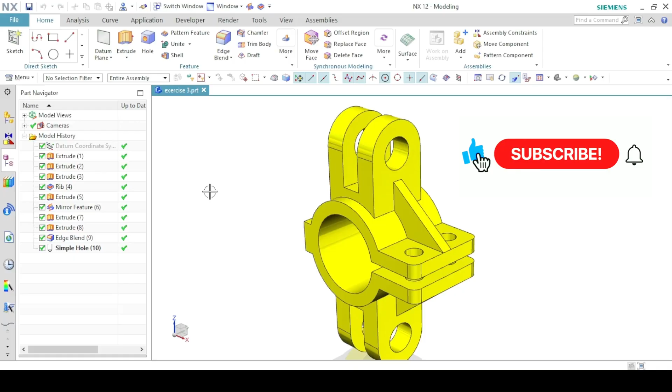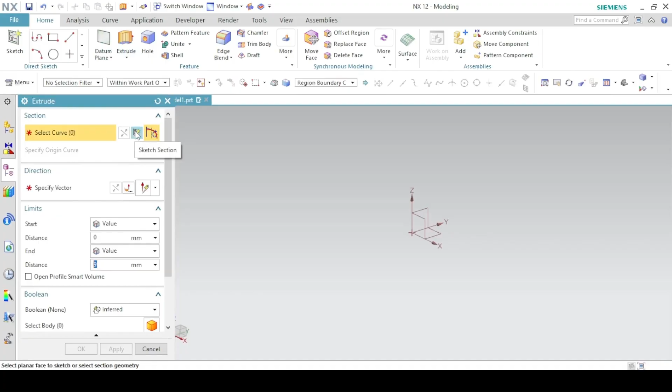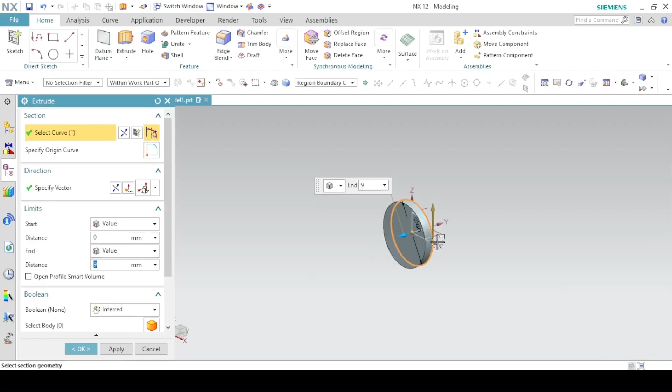You sketch it on the front plane here, which is the XZ plane. Okay. So a circle of diameter 60. Finish. Then we extrude by 50 millimeters. Since you want to make it symmetric, on the start value, we use a symmetric value. And it's 50, so we use 25 so that we have 25 coming forward and 25 going backwards. So when you combine the two, we have 50 millimeters in total. So apply.

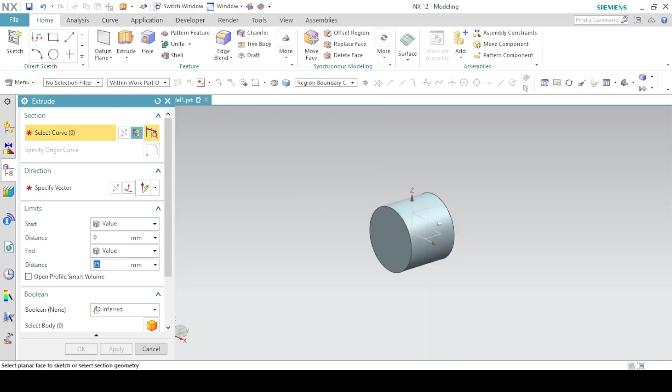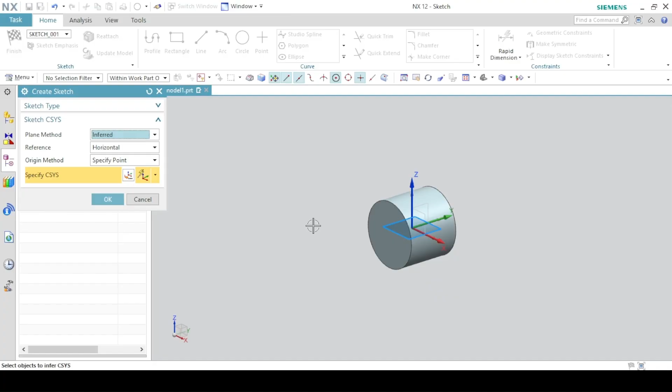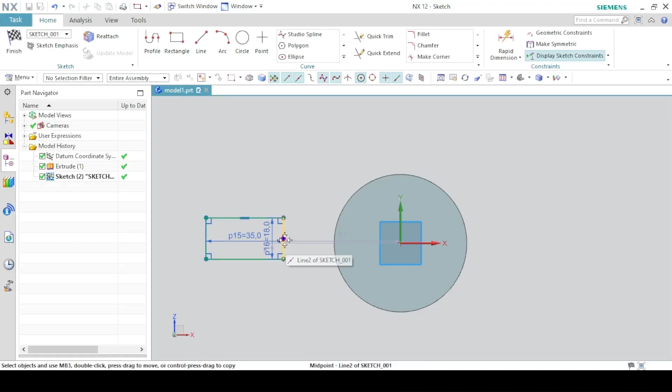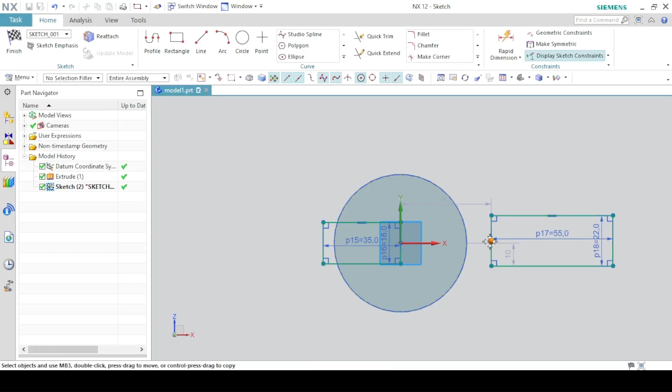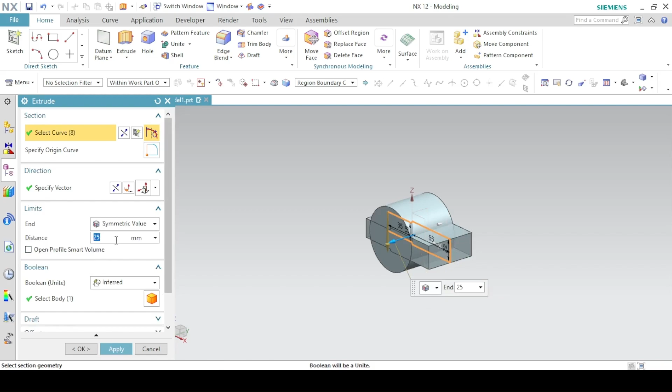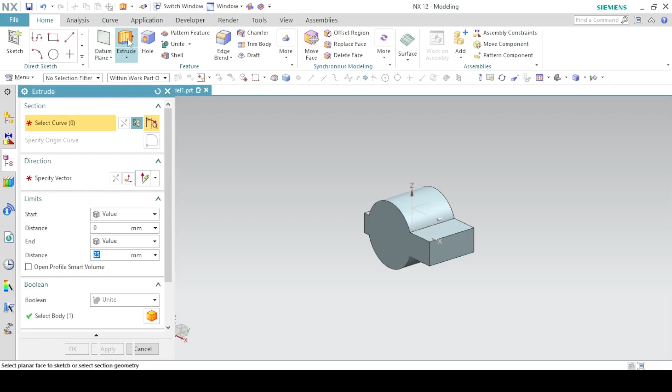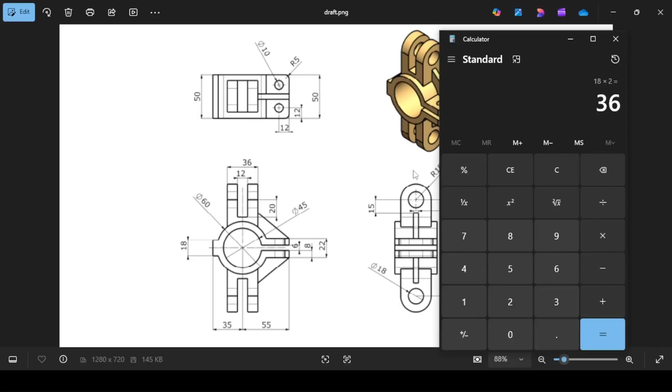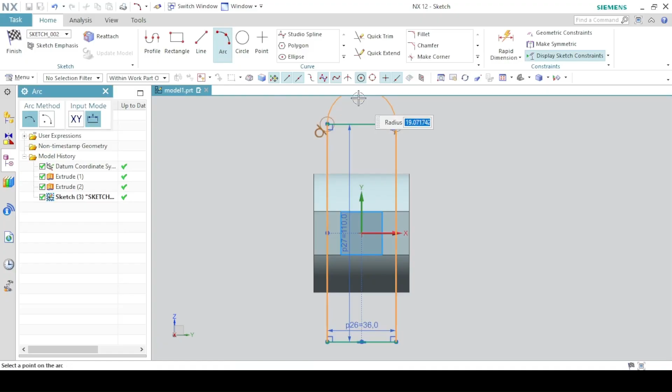Next, to create this slot here, we are going to create them as one block from the top to the bottom here. So again, extrude, sketch section, and this time on this side view, which is the YZ plane. First, we have a rectangle, and the height of the rectangle should be 110, and the length should be the diameter here. So since the radius is 18, the diameter is 18 times 2, 36. So 36 by 110. We use the center rectangle, 36 width and 110 height. Click. And then we draw arcs on these ends to be tangent. And we trim these unwanted edges.

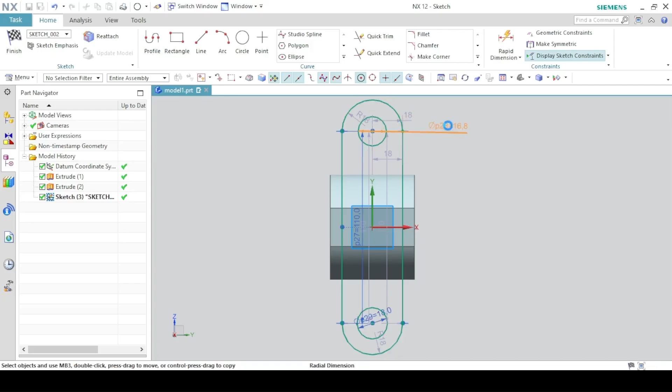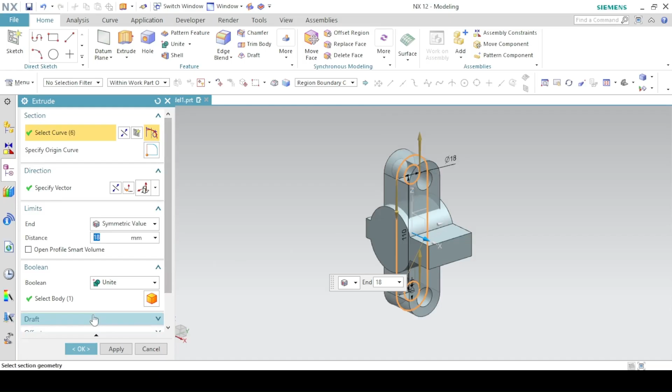Then we add two circles of diameter 18, and their center should be here. So this diameter, change it to 18. Finish. Again, we make it symmetric, so symmetric value, and the width is 36. And since you are using a symmetric value, you have 18, so that's 18 on one side, 18 on the other side, combined will be 36. Set the boolean to unite. Okay.

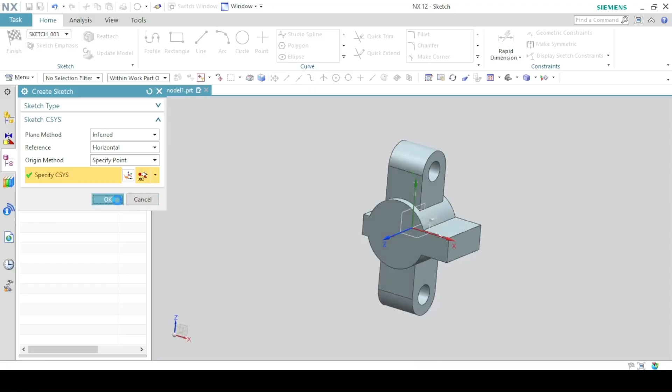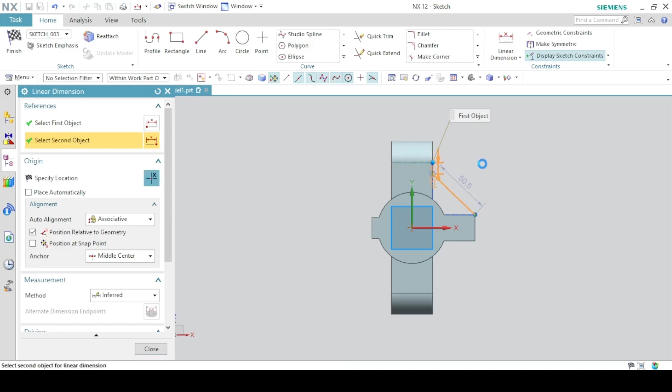Then we can have the rib here. So it locates the rib feature, sketch section, and we sketch the rib on the front plane, which is this XZ plane. The rib starts somewhere here to this point here. On this dimension, the distance from the center here to the rib start is 15. And the center will be here, so the distance from this point to this point, 15. Finish. And the rib should have a thickness of 6 millimeters. Okay.

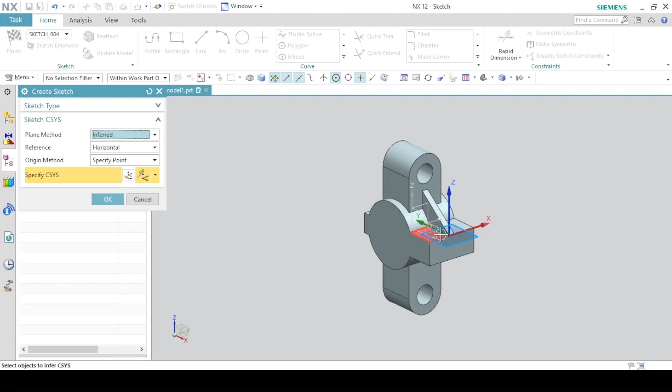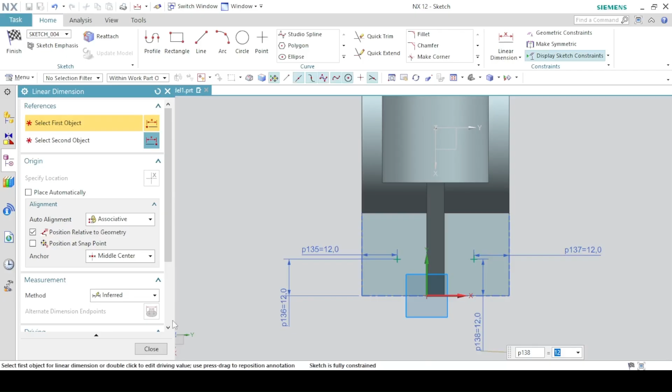Next, we are going to make some cuts. So first, we cut out this hole, and the hole should have a diameter of 10 and 12 from the edges. So with the hole feature, come to sketch section. We are sketching on this face here. Okay. The first point should be here. Second point should be here. And the distance from the edges, 12. Okay. Finish. The diameter should be 10, through body, and okay.

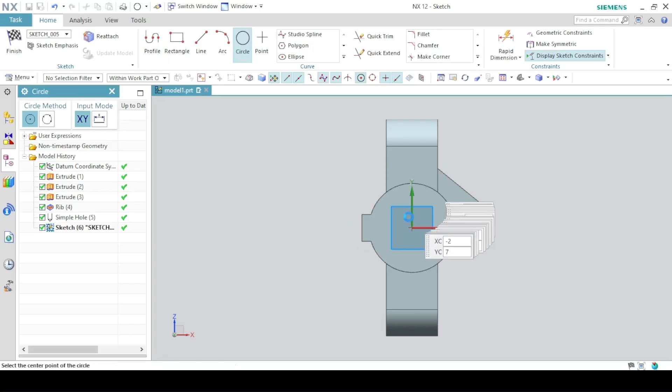Then we make a circular cut here. So we cut a circle of diameter 45. We extrude and sketch section on this face here. Circle of diameter 45. Finish. Reverse the direction, and then we are cutting until next. Set the boolean to subtract. Apply. Again, you're going to cut this face here. Okay.

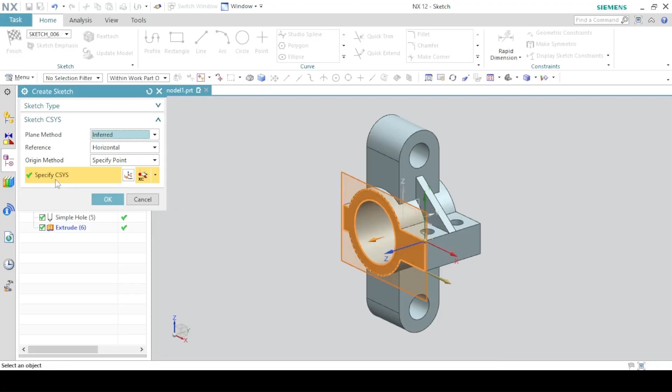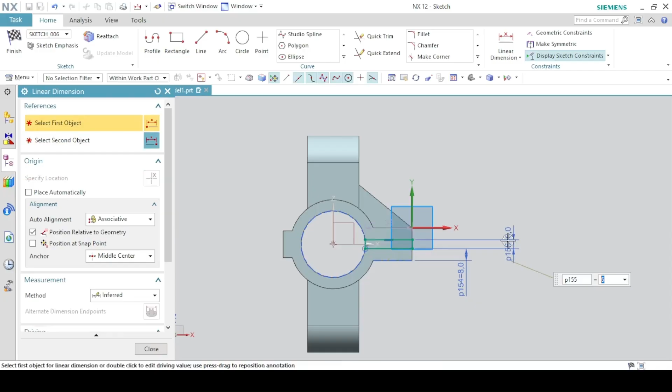Then we cut a rectangle starting from this. Okay, we use the by 2 points method to this face here. Now let's dimension. So the distance from this edge to the start of the rectangle is 8, and the rectangle has a height of 6 actually. So from this line to this line is 8, and the total height here is 6. Okay, so finish and reverse the direction of cut. Set it to until next. Subtract. Okay.

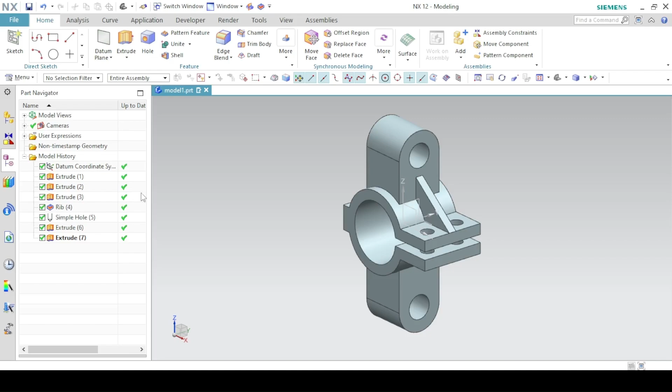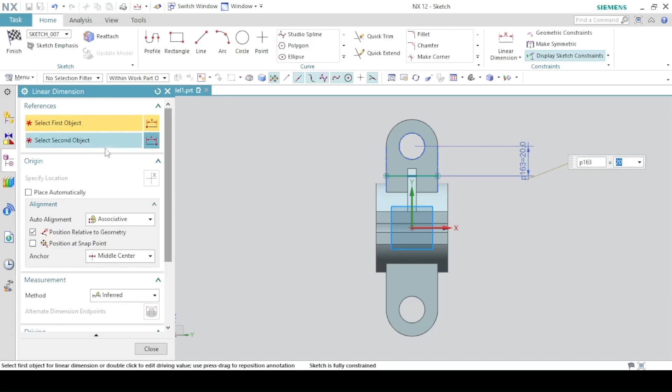Next, you are going to make this cut here also. So extrude, sketch section, and this time on the side view. So you're going to draw this shape inside and then extrude. So we cut a line. And then the distance from the line to the center here is 20. And then instead of drawing this profile, we just have to project the curve. So let's project curve. Click on this arc, this line and this line. Okay. And then we use a quick trim to trim this. We don't need it, so this is just what we have.

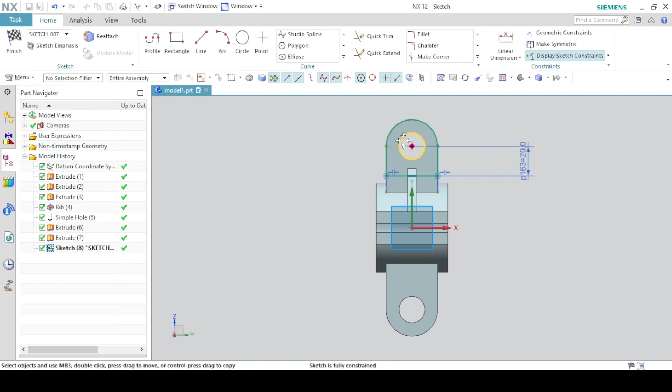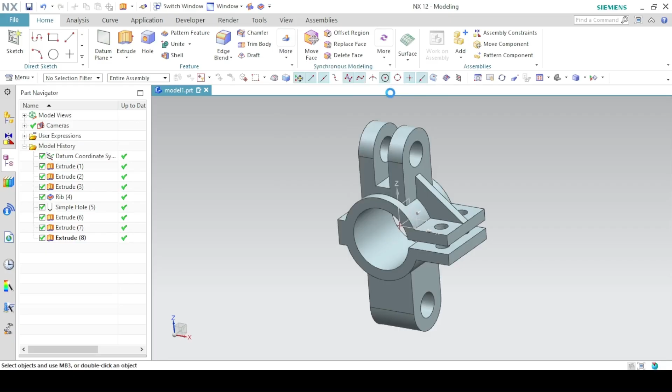We are cutting in a symmetric way, so symmetric value. And the distance is 12, so a symmetric value of 6. Subtract and okay. So this is what we have. We are going to mirror onto the other side, so mirror feature, and the feature will be this extrude cut. The mirror plane will be the horizontal plane, XY plane. Okay.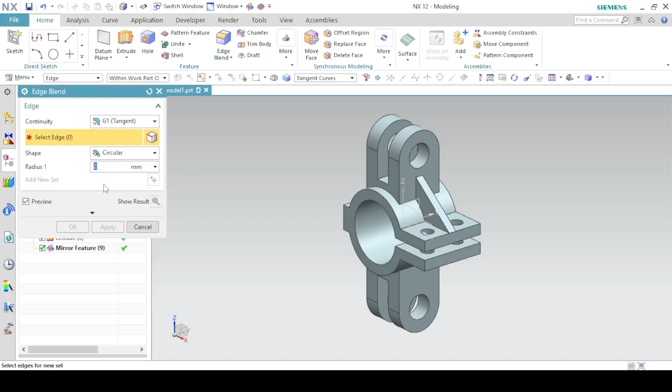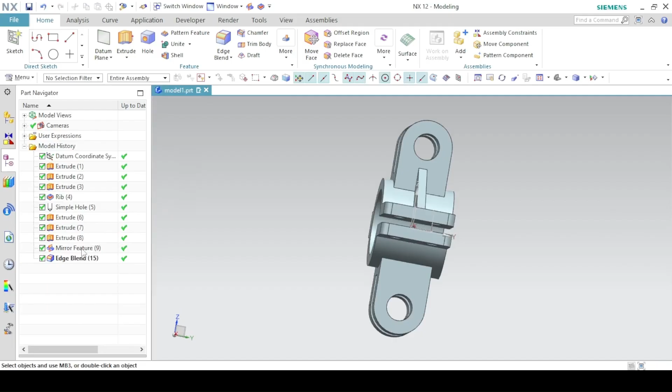Finally, we add a fillet of radius 5 to this edge and we'll be done. The edge blend, radius of 5. Click on these edges. Okay, so there will be another rib here. Again, mirror. Or you can just double click on this mirror feature to edit it. And the features to mirror, you add this rib because you are using the same plane. So okay, this is what we have.

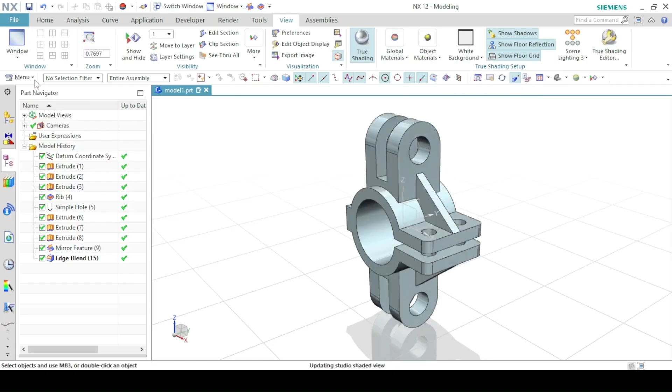Now we can change the background. So come to view, true shading. And the background can be white or any background you want. A global material, you can use the glossy plastic wash. And under selection filter, select solid body, so we can click on the body and then edit display. So we give it a yellow color. Apply. So yeah, that's how to model this part using Siemens NX.